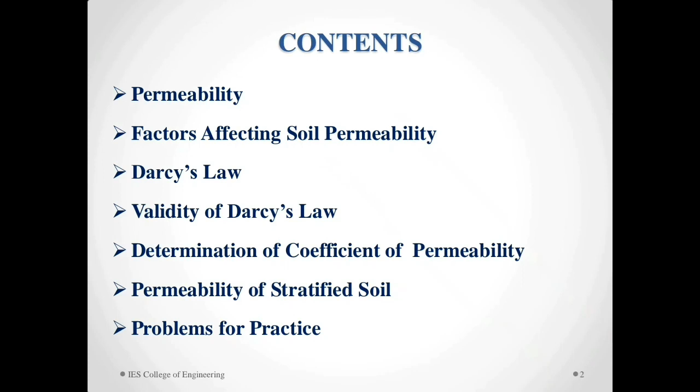Coming to the first topic, that is permeability. It is a property of a porous material which permits the passage of water through its interconnecting voids. It is a very important engineering property.

According to permeability, we can classify soil into two types: permeable soil and impermeable soil. Permeable soil means the voids between soil particles are large, which permits the flow of water. Example: gravels. Gravel has large space between each particle so that water can flow through it easily.

Next is impermeable soil. The space between soil particles is less. Example: clay. Considering the flocculated and dispersed structure of clay, the flocculated structure has higher permeability than the dispersed structure.

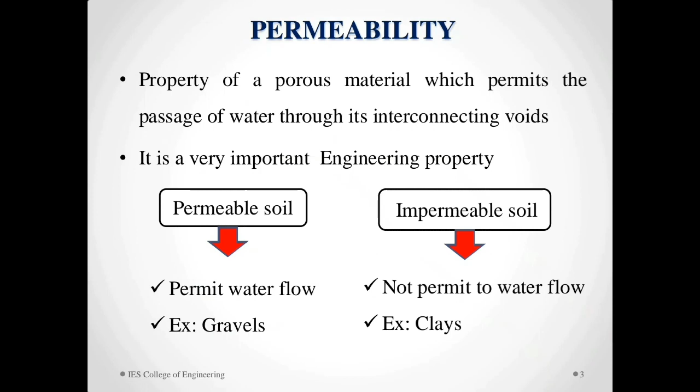Next is the importance of permeability. Permeability is essential for some cases, that is, we have to calculate the hydraulic conductivity, that is permeability.

The first one is settlement of building. Permeability influences the rate of settlement of a saturated soil under load.

Next is yield of water bearing strata. Due to high permeability, a layer of soil or rock can contain water and transfer it from pore to pore quickly. Example: aquifer. Next is stability of earthen dams.

By knowing the hydraulic conductivity of soil, we have to control the seepage through the embankment. That is, we can provide suitable filters according to the hydraulic conductivity of the soil.

Next is uplift pressure under hydraulic structure. The water seeping below the hydraulic structure exerts an uplift pressure on the floor. The pressure will be maximum and the floor cannot resist it, so there will be a failure. By knowing hydraulic conductivity, we can use preventive measures for reducing the uplift pressure.

Then the last one is seepage through and below the earth structure. Due to this, erosion occurs. So we can avoid this by calculating the permeability.

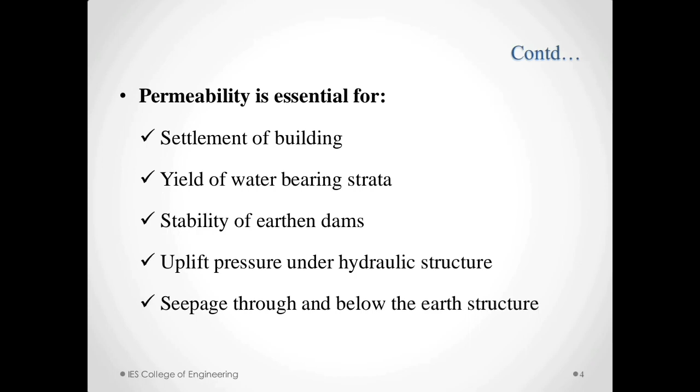Now we are discussing factors affecting soil permeability. First one is particle size. Permeability is proportional to the square of particle size. Permeability of coarse grained soil is very large as compared to that of fine grained soil.

The next one is void ratio of soil. Greater the void ratio, higher the value of hydraulic conductivity.

Next is properties of water. Hydraulic conductivity is proportional to the unit weight of water, that is gamma W, and hydraulic conductivity is inversely proportional to viscosity mu.

The next one is shape of particles. Permeability depends on the shape of particle. Angular particles have greater surface area compared to rounded particles. For the same void ratio, angular particles are less permeable than rounded particles.

The next is structure of soil mass. Permeability is more in the case of flocculated structure compared to dispersed structure.

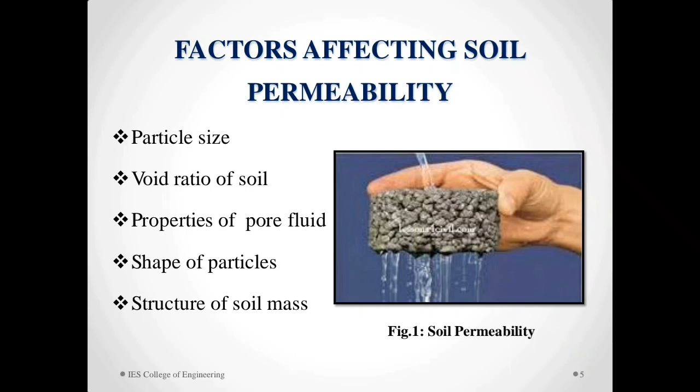The next factor is degree of saturation. Permeability of partially saturated soil is less than that of fully saturated soil.

The next factor is absorbed water. It means a thin microscopic film of water surrounding individual soil grains. This water is not free to move, so the effective pore space is reduced, thus hydraulic conductivity decreases.

Then next is stratification of soil. Permeability is maximum when the flow is parallel to soil layers. The details about soil stratification are explained in the coming slides.

The next one is entrapped air and organic impurities. They obstruct the flow and hydraulic conductivity is reduced due to their presence. And the last one is temperature. As viscosity of the pore fluid decreases with temperature, permeability increases with temperature.

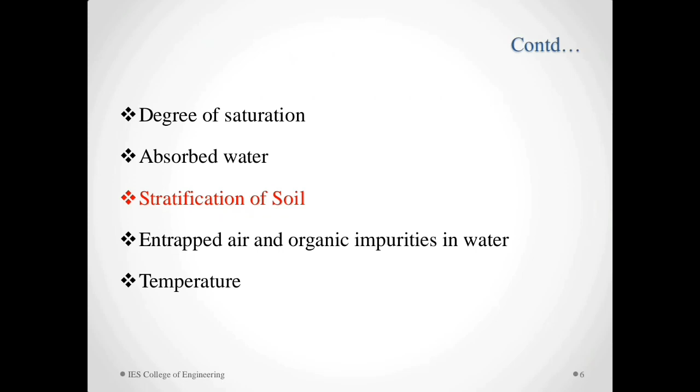Coming to the next slide, it is about Darcy's law. It is an equation that describes the flow of a fluid through a porous medium. The law was formulated by Henry Darcy based on results of experiments on the flow of water through beds of sand.

Darcy's law states that for laminar flow through saturated soil mass, the discharge per unit time is proportional to the hydraulic gradient.

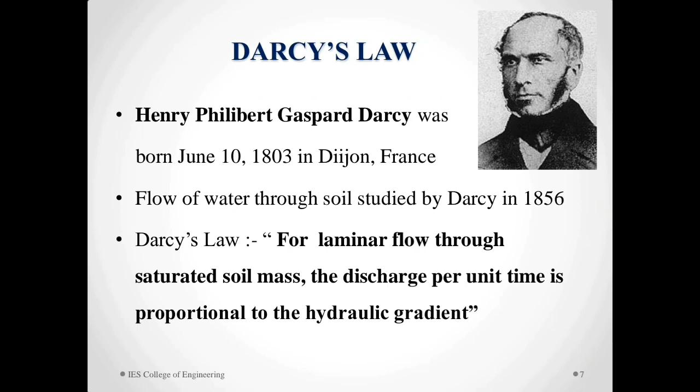Darcy demonstrated experimentally that for laminar flow in a homogeneous soil, the velocity of flow is given by V equals Ki. The experimental diagram is shown in figure 2. The discharge Q is equal to V into A. The V is the discharge velocity or superficial velocity.

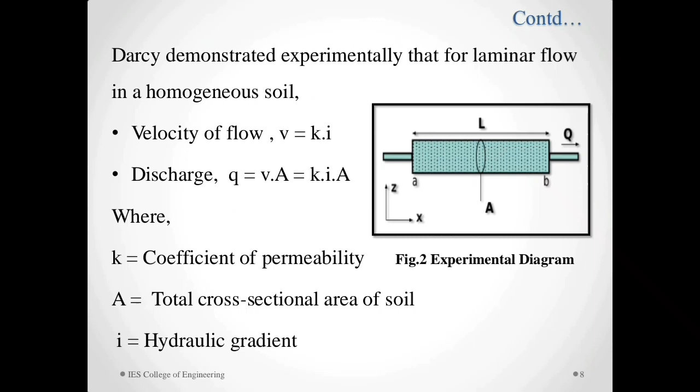The V can be transformed into K into I, that is Q is equal to K into I into A. The hydraulic conductivity K is a product of Darcy's law.

Coming up to the next slide, it is about validity of Darcy's law. There are some conditions for satisfying Darcy's law. The first one is the law is valid if the flow through soil is laminar.

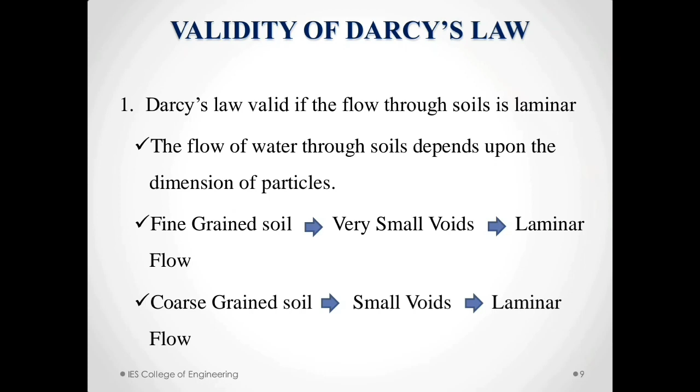Depending upon the dimension of soil particle, the flow of water may vary. Fine-grained soil consisting of very small voids allows laminar flow. In case of coarse-grained soil, voids are larger than fine-grained soil, but laminar flow still occurs. Boulders are very coarse-grained soil, so voids are large and turbulent flow occurs.

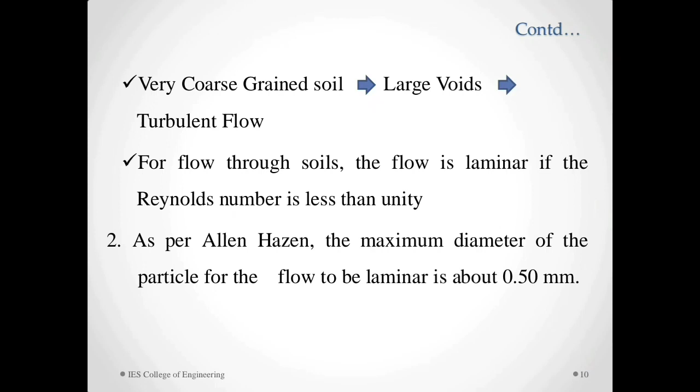Also, Reynolds number should be less than 1 for laminar flow. The next condition is that as per Allen Hazen, the maximum diameter of particle is about 0.5 mm for laminar flow.

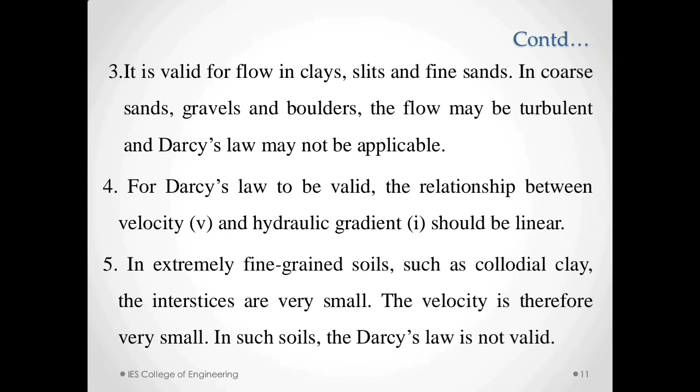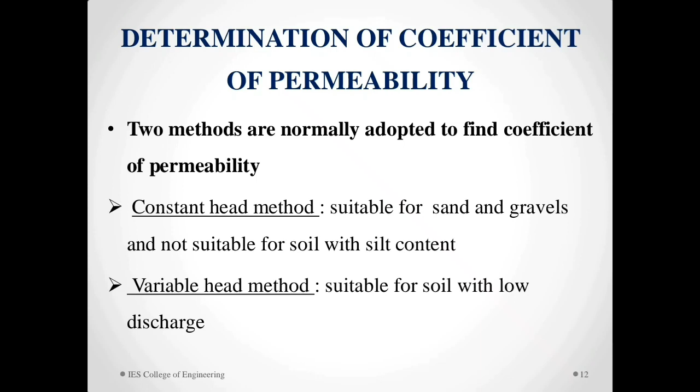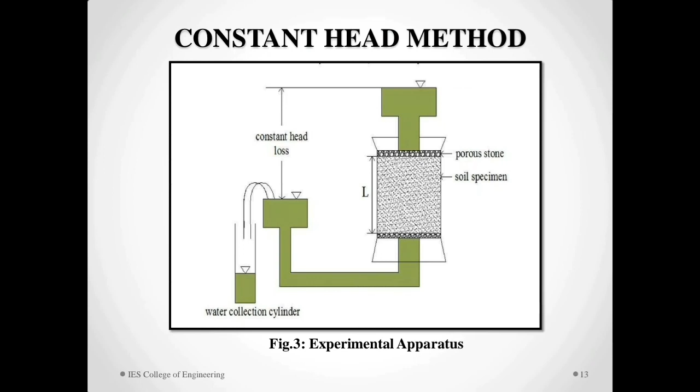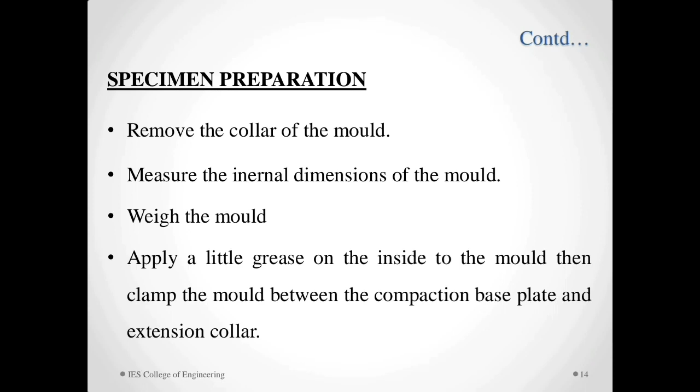After that, slightly grease the inside of the mold and then clamp the mold between compaction base plate and extension collar. Remove the collar of the mold and measure the internal dimensions. Then weigh the mold and slightly grease the inside of the mold, then clamp it between compaction base plate and extension collar.

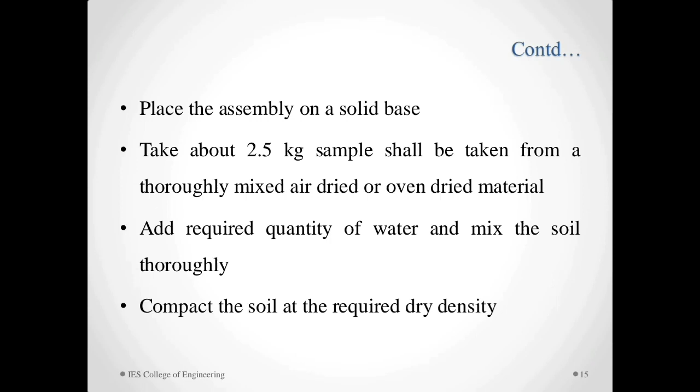Take 2.5 kg of sample and mix it with the required quantity of water. Then compact the soil to the required dry density. Trim the excess soil and weigh the mass of soil in the mold. After that, place the mold with sample in the permeameter.

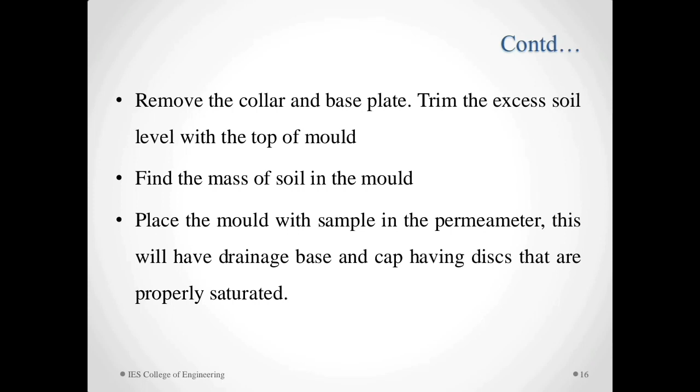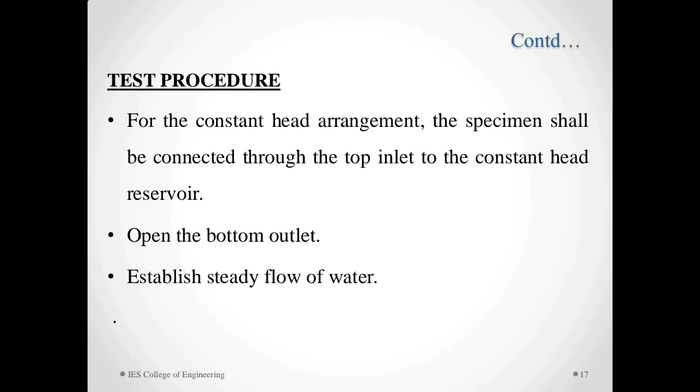The permeameter has a drainage base and cap having discs that are saturated. For the test procedure, connect the top inlet of the permeameter to the constant head reservoir and then open the bottom outlet. After some time, a steady flow will occur. Then collect the water for a convenient time interval.

Repeat it 3 times for the same interval. From this, we can calculate the average coefficient of permeability K.

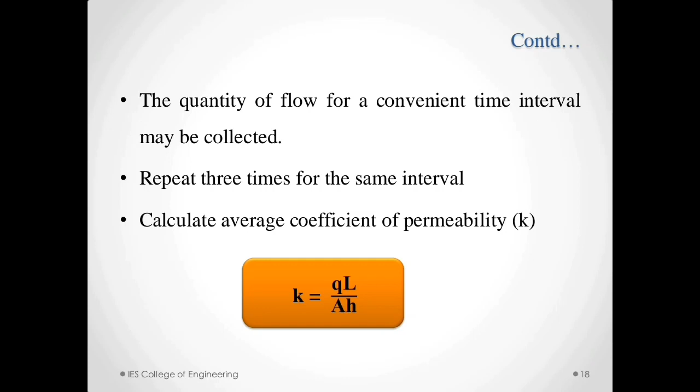K is equal to QL divided by AH, where K equals coefficient of permeability, A is cross-sectional area in centimeter square, Q is discharge in centimeter cube per second, L is length of specimen in centimeter, and H is constant head causing flow in centimeter.

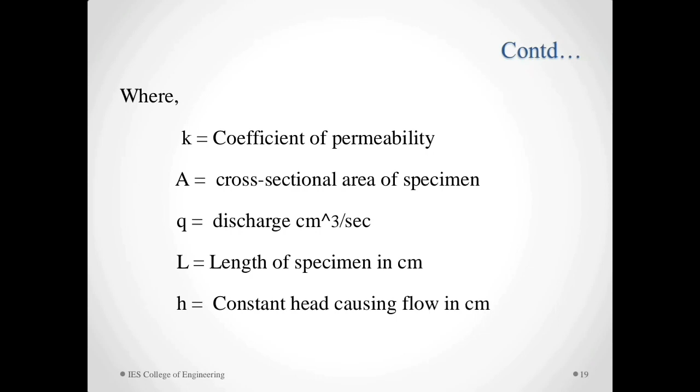The next method is the variable head method, or falling head method. This is mainly used for soil with low discharge. Here the stand pipe is connected at the top inlet. In case of constant head, there is a constant head reservoir. Here a piezometer is used for falling head measurement.

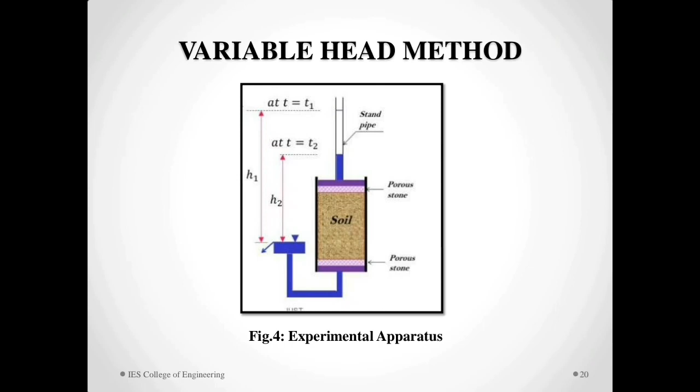Coming to the procedure of the variable head method: put the weighed soil into the mold and the end plug into the top collar. Then place it on the compressive machine and apply force till the flange of the end plug touches the collars.

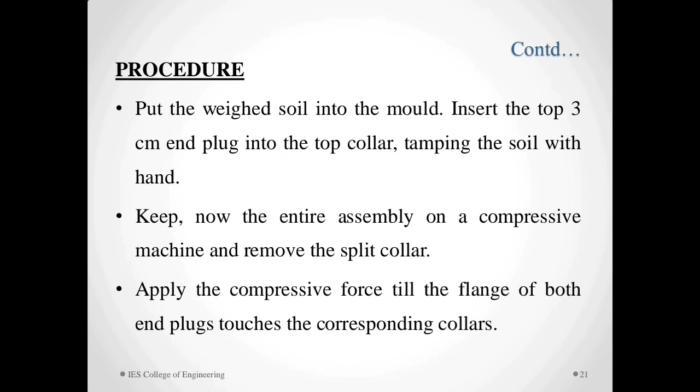Maintain the load for 1 minute and then release it. After that, remove the plug and collar. Then place filter paper on fine wire mesh on top of the soil specimen. Turn the mold assembly upside down and remove the 2.5 cm end plug and collar.

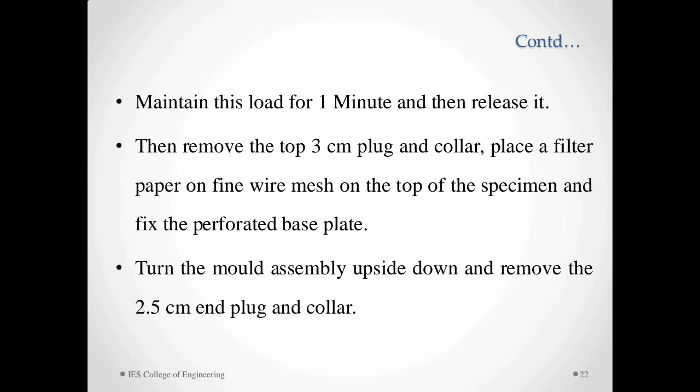Place the top porous plate on top of the soil specimen and fix the top cap on it after inserting the gasket. Now the specimen is ready for the test.

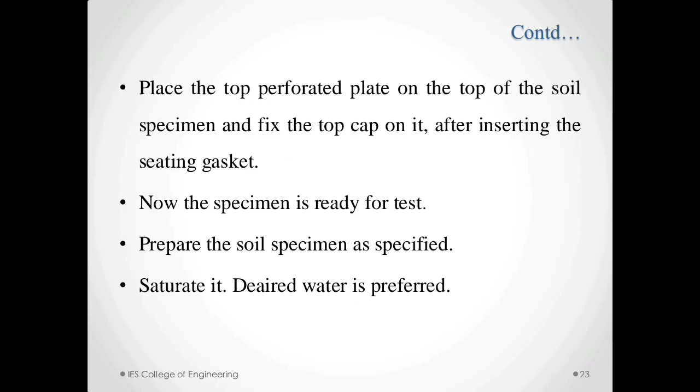Saturate the soil specimen the same way as in the constant head method. Then place the permeameter in the bottom tank and fill the tank with water. The top inlet is connected to the standpipe. Allow some water to flow until steady flow occurs.

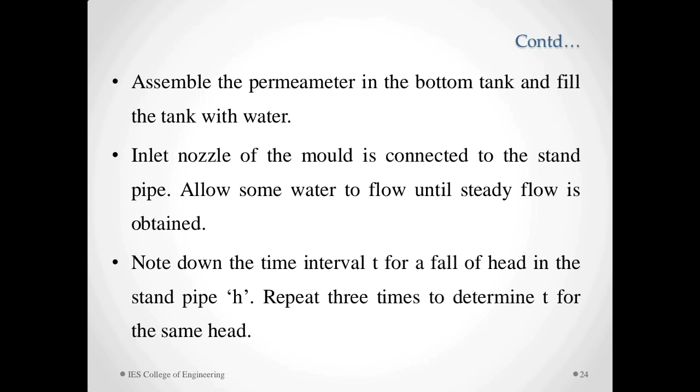Note down the time interval T for a fall of head H, then repeat it 3 times to determine T for the same head H. Then find A, the area of the standpipe, by dividing discharge by head, that is Q by H. Therefore, we get coefficient of permeability K equal to...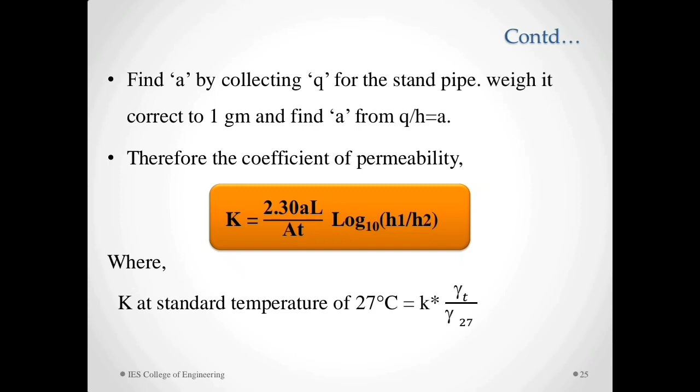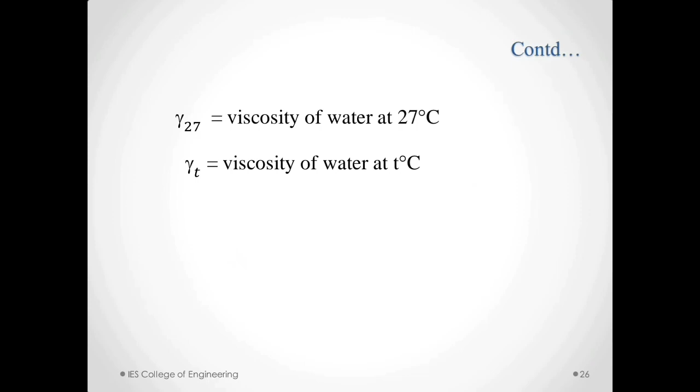2.30 AL divided by AT log base 10 of H1 by H2, where K is at a standard temperature of 27 degrees Celsius, K into gamma T by gamma 27. The gamma 27 and gamma T are the viscosity of water at 27 degrees Celsius and T degrees Celsius respectively.

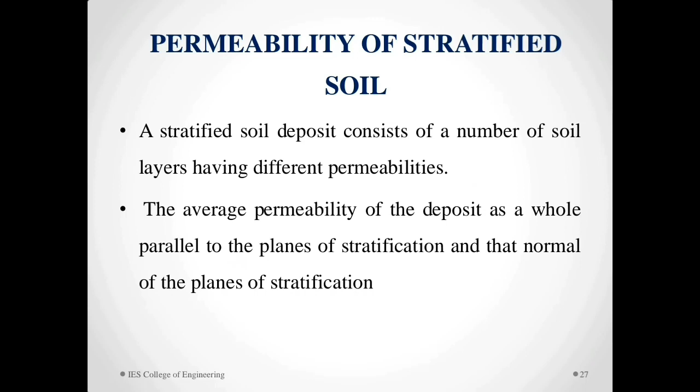Coming to the last topic of this section: permeability of stratified soil. A stratified soil deposit consists of a number of soil layers having different permeability. Average permeability is equal to parallel to the plane of stratification plus perpendicular to the plane of stratification. The first case is flow parallel to the plane of stratification.

Let us consider a deposit consisting of two horizontal layers of soil of thickness H1 and H2, as shown in figure 5, flow parallel to bedding in soil layers. Here, the loss of head, small h, over length capital L is the same for both layers. The hydraulic gradient I for each layer is equal to that of the entire soil deposit.

From the equation of continuity, the total discharge Q per unit width is equal to the sum of discharge in the individual layers, that is Q equals Q1 plus Q2. Let K1 and K2 be the permeability of layers 1 and 2, and KH be the overall permeability in that direction, the parallel direction.

KH into I into (H1 plus H2) equals K1 I H1 plus K2 I H2. From this we can find the overall permeability KH equal to (K1H1 plus K2H2) divided by (H1 plus H2). Here the hydraulic gradient I is the same on both sides, so it cancels out.

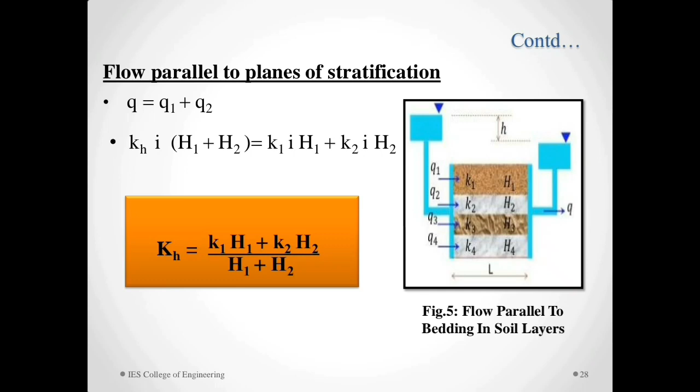Where K1 and K2 are the permeability of layers 1 and 2 respectively, and KH is the overall permeability in that direction.

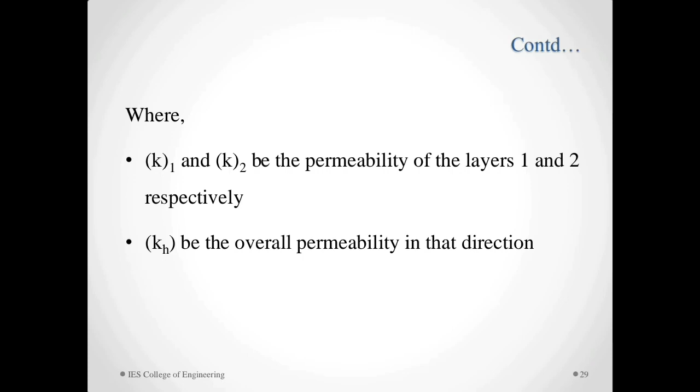Next is flow normal to the plane of stratification. Let us consider a soil deposit consisting of two layers of thickness H1 and H2, in which the flow occurs normal to the plane of stratification, as shown in figure 6.

K1 and K2 are the coefficient of permeability of layers 1 and 2 in that direction, and Kv is the average coefficient of permeability of the entire soil deposit. In this case, the discharge per unit width is the same for each layer and is equal to the discharge in the entire deposit.

This case is analogous to resistance in series in an electric circuit. Current is the same for all resistances, so Q is equal to Q1 equal to Q2.

Using Darcy's law, Q is equal to Kv into I into A, so Kv into I into A equals K1 into I1 into A equals K2 into I2 into A.

From this we can find I1 and I2. I1 equals Kv by K1 into I, and I2 equals Kv by K2 into I.

Then total loss of head H is equal to H1 plus H2. The loss of head can be found using hydraulic gradient into length, that is I into L. So H equals hydraulic gradient small i into length of soil layer capital H, which is equal to I1 into H1 plus I2 into H2.

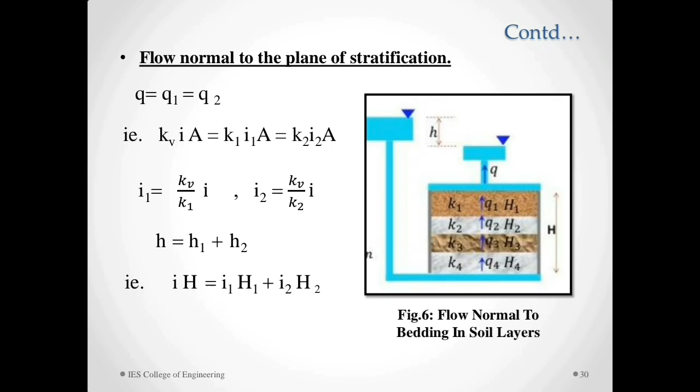Substitute the values of I1 and I2 in this equation. We get IH equal to Kv by K1 into IH1 plus Kv by K2 into IH2. From this, overall permeability Kv equals H1 plus H2, all divided by H1 by K1 plus H2 by K2.

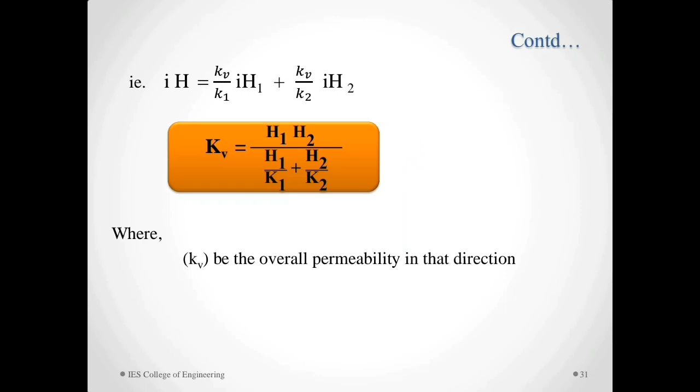The given data are: D equal to 4 centimeter, L equal to 180 mm which converts to 18 centimeter, H1 equal to 1 meter which is 100 centimeter, and H2 equal to 0.4 meter which is 40 centimeter.

Time T is given in the question as 20 minutes, and the standpipe area is given in the question as small a equal to 1 centimeter square.

So the cross sectional area of the specimen, capital A, equals pi by 4 into d square. Pi by 4 into d is 4, so pi by 4 into 4 square, which equals 4 pi centimeter square.

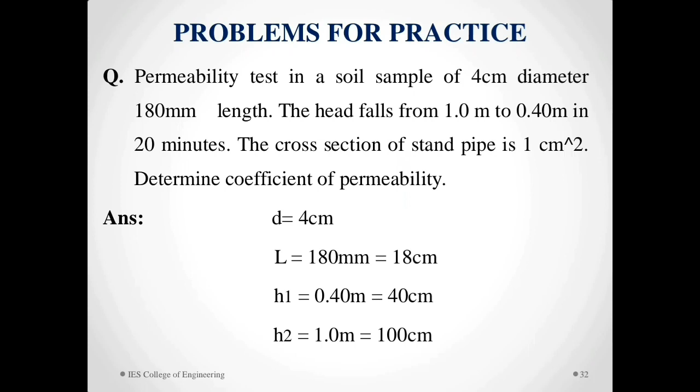Then the coefficient of permeability K equals 2.30 aL by AT log base 10 of H1 by H2. This equation belongs to falling head. Since the head falls from 1 meter to 0.4 meter in this question, we use this falling head equation K equal to 2.30 aL by AT log base 10 H1 by H2.

By substituting all the values, we get K equal to 0.065 centimeter per minute. We can convert it into seconds as per the question.

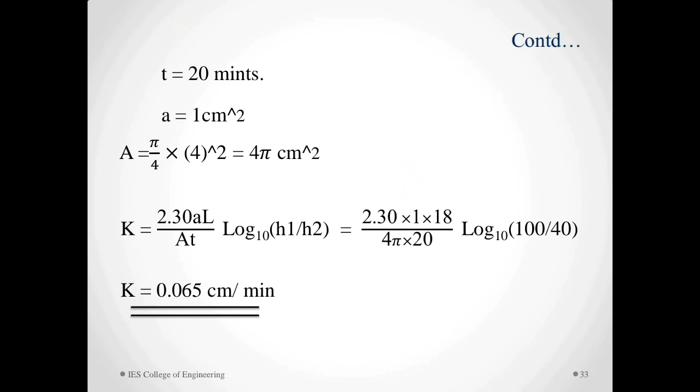Then the next question: Calculate the permeability of a soil sample 6 cm in height and 50 cm square in cross-sectional area. If the quantity of water collected in 10 minutes is 430 ml under an effective constant head of 40 cm, and on oven drying the test specimen has a mass of 48 grams, taking the specific gravity of soil as 2.65.

Calculate the seepage velocity of the test. Here we have to calculate the velocity, that is the seepage velocity.

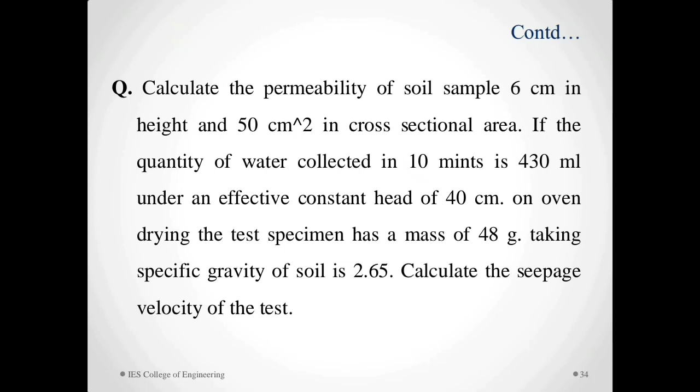The given data are constant head 40 cm and discharge of 430 ml in 10 minutes, which we convert into seconds. So 430 divided by 10 into 60 equals 0.7166 centimeter cubed per second.

Then the coefficient of permeability for the constant head equation is K equal to QL by AH. Substituting all the values, we get the coefficient of permeability.

By equation of continuity, Q is equal to AV, where V is the seepage velocity. So we have to find V equal to Q by A, where A is the area of the specimen.

This gives 1.4322 into 10 raised to minus 3 centimeter per second. This is the seepage velocity.